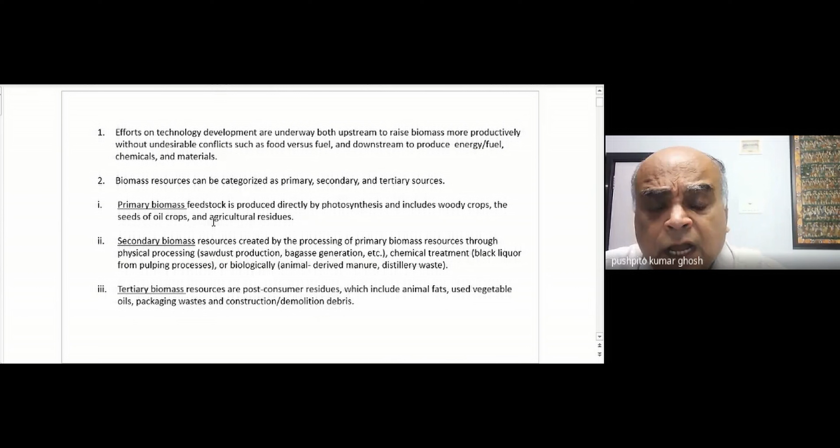Or let's say I have got paper packaging. Now you see a lot of it with all this Amazon delivery, so much packaging, cardboard boxes. Once it has done its job of delivering whatever good you had ordered, after that the packaging is a waste, so you have to do something with it. Or let's say you're demolishing a house and there was a lot of wood used in that house, so all that debris will now become tertiary biomass.

So I hope the definitions are clear of primary, secondary, and tertiary biomass. Is everybody clear about the definitions?

Yes, sir. Yes, sir. Okay.

Now, let's look at the interface. On the left, you have got biomass, okay? And on the right, you have got bioproducts. And of course, our focus will be really on energy, because this is on renewable energy sources, and so we'll be mostly focused on biofuel and power.

Energy means power, and not so much on the pharmaceuticals or value added chemicals and things like that. But those are also bioproducts. Okay. But our focus will be mostly here. And what we really have to look at is how do I go from biomass to this part? And so you have different kinds of ways of really treating biomass.

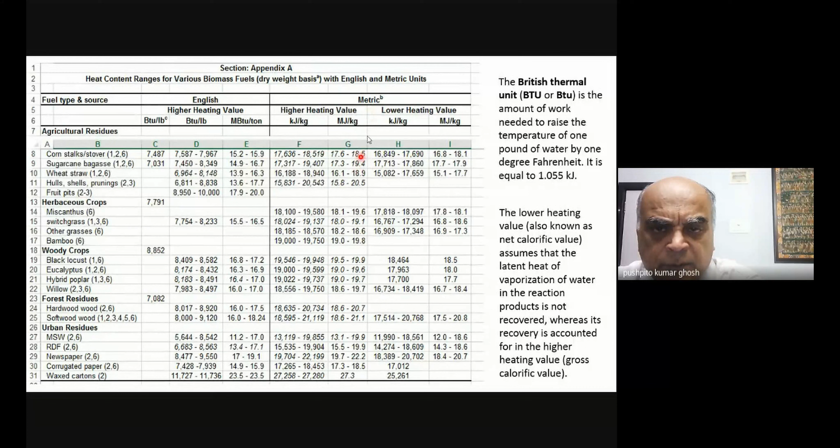So you can see how to express the two, in either BTU or in the metric system. Now the second thing is that you would see over here that they've got a higher heating value, especially in the metric system they've defined it, the higher heating value, and also the lower heating value. So, I think we discussed it briefly - can anyone try to recall what is higher heating value and what is lower heating value?

Water vapor is included in one. Very good, water vapor is included. Huh? What did you say? Yes, sir. And what does it do therefore? It takes into account the heat of vaporization. Excellent, excellent, okay.

Normally, let's say when we burn something, and we said that most fuels will have some hydrogen, except if you have got anthracite coal, which is like pure carbon, in which case it will only form CO2 when it burns. When it forms CO2, there's no issue - the higher heating value and lower heating value will be the same.

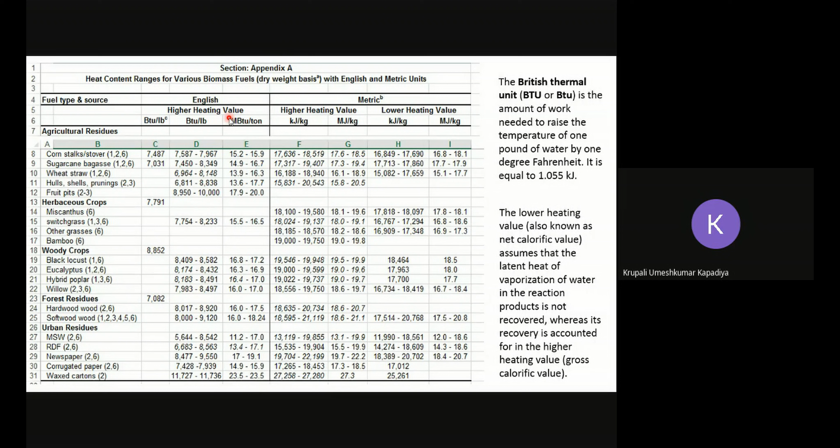But we know that water vapors can be condensed to form water. Now, if it condenses, what will happen? Once a vapor condenses, it liberates heat—very good—it liberates the latent heat.

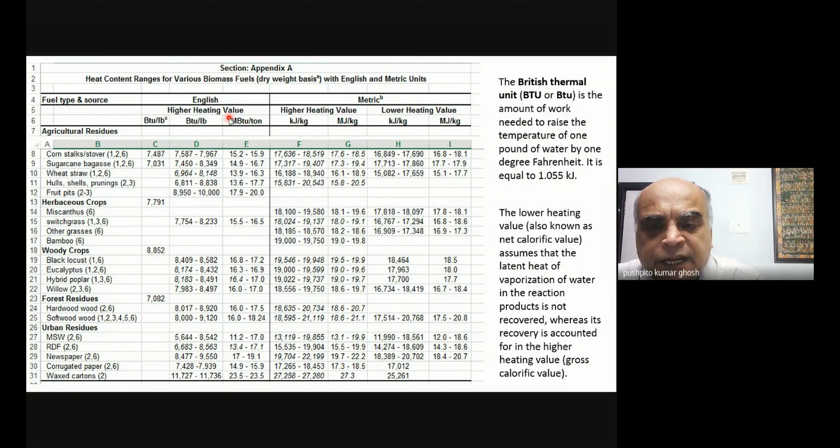So what happens is that if I do my operations in a way that I can recover the latent heat from the water, then it is called the higher heating value. That means I get the sum total, the lower heating value plus the heat that was evolved when vapors condensed into water.

Also, the higher heating value is many times called the gross calorific value, and the lower heating value is also known as the net calorific value. So just bear that in mind. For example, here you can see higher heating value 17.636 to 18.519, and this is 16.849 to 17.690. Obviously the lower heating value is lower because I did not recover the heat from the water that was formed, right?

Now, this thing tells you the calorific value of different types of agricultural residues. This is mostly focused on agricultural residues. So in most cases, you'll find that these values are not very different.

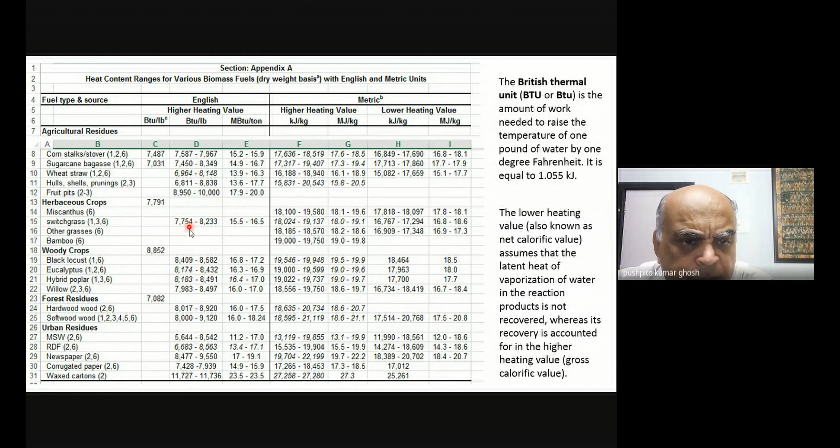Now, if for example I have things like municipal solid waste, where you could have a much higher moisture content, or refuse derived fuel, these things will tend to be lower. Whereas newspaper—after all, newspaper is basically cellulosic material, made from cellulose—so they will again be similar to these, not very different in terms of value.

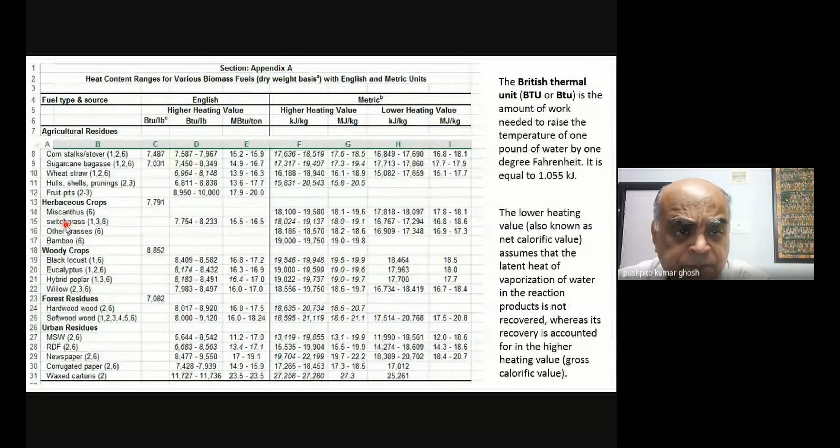Now it's very important for you to know that many people are trying to grow grass as a fuel. There are certain grasses which grow very fast—one of those we'll discuss is switchgrass. A lot of work is going on in the United States. This switchgrass grows very, very fast.

And because it is like cellulose, there's no difference between sugarcane bagasse and switchgrass—they're more or less similar. So I will expect to get similar kind of energy from grass as I will get from bagasse. There's not much of a difference.

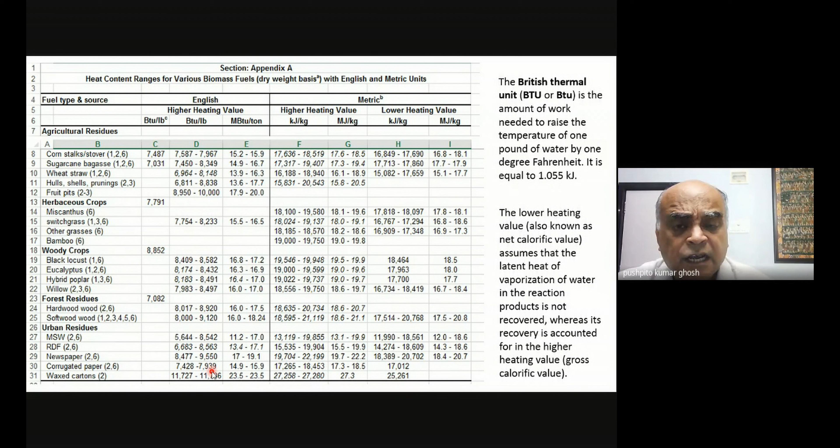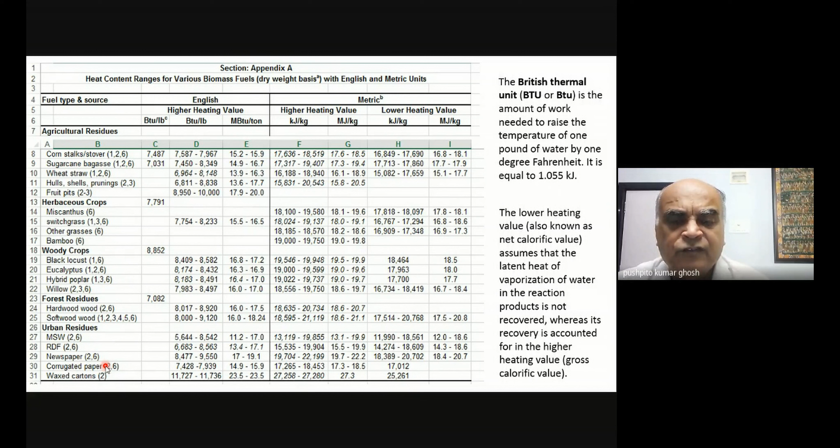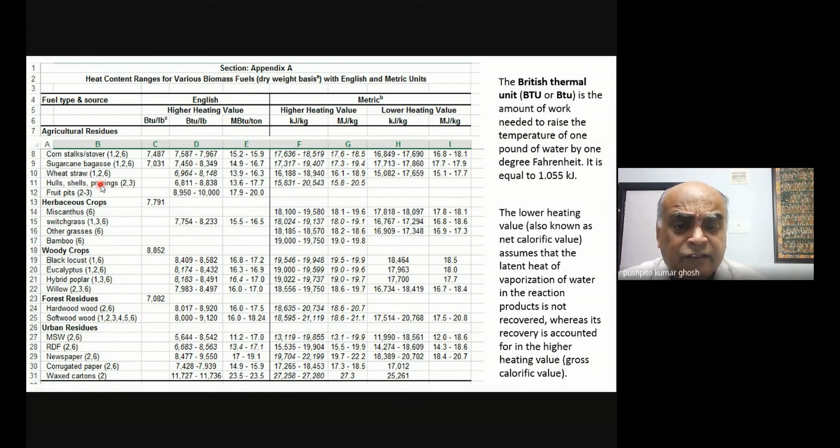Just keep this in mind, and at the end of it, which of these you will process really depends on what is available with you. Obviously, I'm not going to import things from far to process it—these must be readily available somewhere in the vicinity, and then I'm trying to derive fuel out of it. So that's really what this is. But it's very good that you can, at a glance, see the kind of calorific value different things have.

Now let me show you an example of a very smart application of the lower and higher heating value. Although this was not done with a biomass derived fuel, this work was done with methane, natural gas. But don't forget, I can also make natural gas from biosystems like biogas—that's also methane. It doesn't matter whether it came from biological sources or from petrochemical sources; methane is methane. Now what did these people do?

Now what they did was, earlier people were using coal and wood, burning it and generating energy. They needed to run their boiler, so they needed a source of fuel. Things like coal were being used.

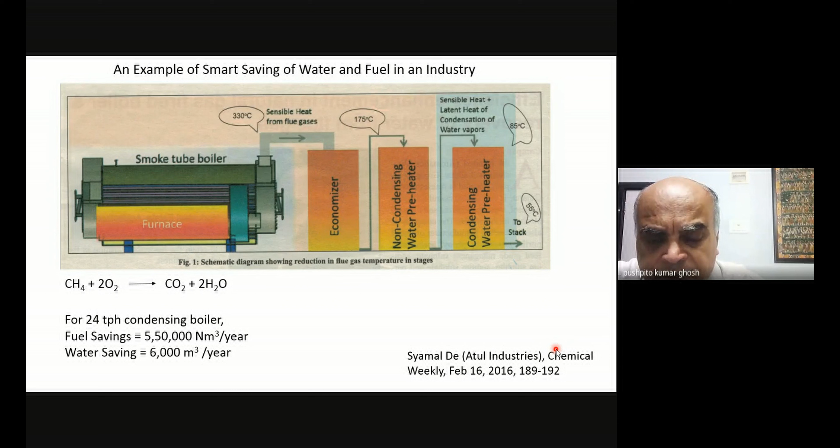So that's the advantage. Did everybody understand this? All clear? Yes sir, okay.

Now let us go a little further, and I will repeat these over and over again just so that it becomes a part of you. We talked about this briefly, but if I've got a biomass feedstock, I can do 4 different things with that biomass.

Well, actually there's a 5th thing that I can do, but this is mostly about thermochemical conversion. I could also do a chemical conversion or I can do a biological conversion. We're not talking about that here. We are really talking about thermochemical conversion, mostly where I have to heat it up to a high temperature, and some amount of chemical processing could also be involved in the process.

Now the most basic thing, of course, is combustion. Combustion means that I am supplying adequate amount of air and oxygen in it, so that all of my biomass can burn and burn completely to form carbon dioxide. That's what combustion is.

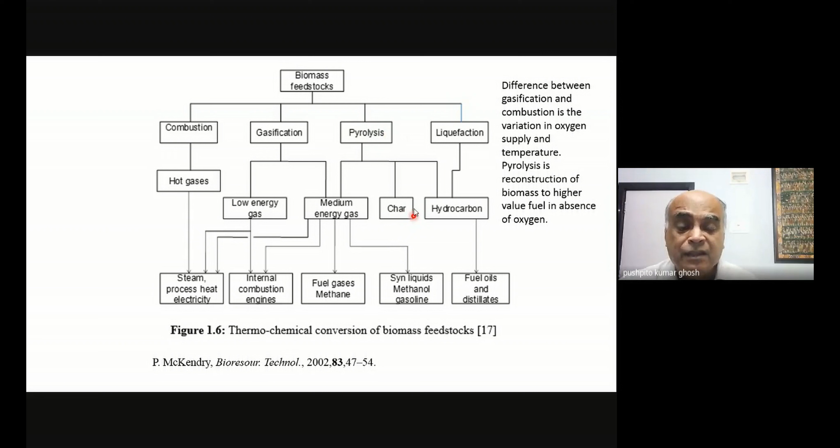Even from pyrolysis, I can end up, for example, in some cases forming methane, or I can end up forming char, like charcoal, like pure carbon. That's what I can do with pyrolysis. And if I've got pure carbon and also if I've got carbon dioxide, I can do very interesting combinations of the two and end up with synthetic fuels. We will again discuss that.

Liquefaction is a kind of hydrothermal processing where you have to use hydrogen as a second component. So I have my biomass and I also put in hydrogen, and in the process I can generate hydrocarbon type fuels, like fuel oils. So these are the various types of products which I can get from thermochemical processes.

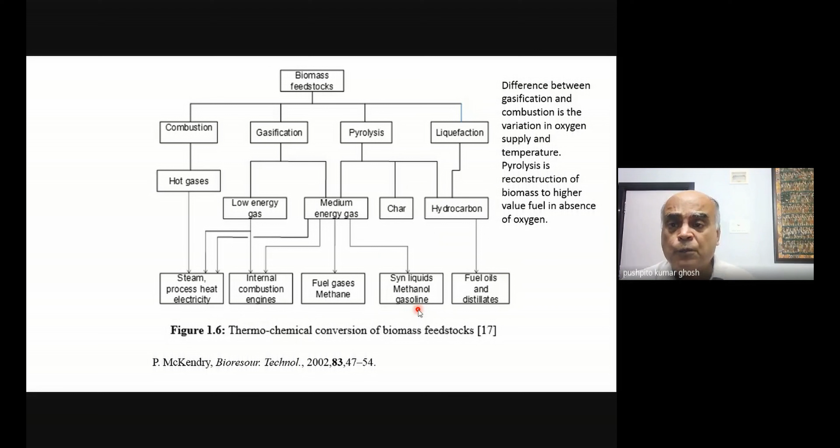Now let us also look at some practical things, very practical. And many times what you'll find is that our intention is good, we want to do things, but we don't facilitate what will actually make it happen.

For example, suppose I've got an agricultural field and I've harvested my crop. All that residue just lies in the field. What do people do sometimes? They'll come at night and light a match, and you'll find the whole field is burning. Why? Because they have to clear the field for the next round of planting crops, and they can't plant with all of this around. So they just burn it, and the ash is useful in the field, so they use that. But they're not making any use of the calorific value of this stuff.

But look at this, it's a simple machine, a baling machine. Look how beautifully they compact this stuff. I used to see a lot of it in England, every field you'd see this beautiful cylinder type of biomass. It goes into a baling machine and gets compacted. It need not only be cylindrical, for example you can see nice rectangular shaped biomass with very high density. This is not low density, it's extremely heavy. They compact it, and you can see how it gets compacted here.

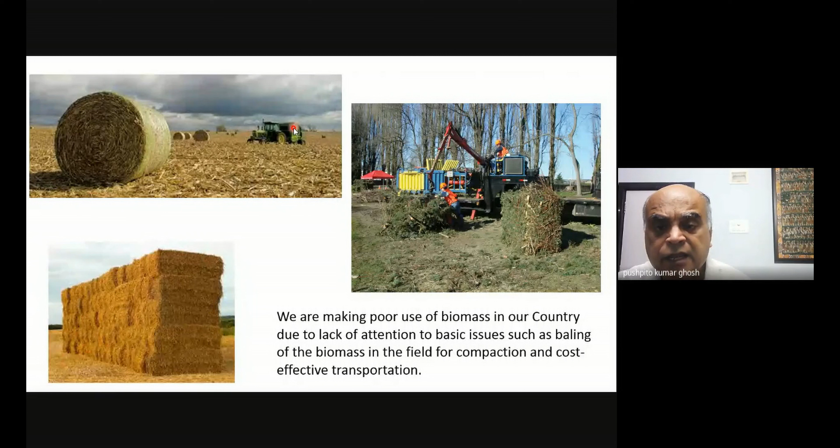So what I would say is that all of you go looking around, because many of you probably come from areas with a lot of agriculture. Notice, observe what they are doing. Can you suggest them something better to do? And exactly the same thing is true about municipal solid waste. If you can make it in a very compact form, a lot of people will take it and derive energy from it. So this is baling.

Now let me tell you about a couple of issues in more detail. When we say biomass, it's not just about carbon, hydrogen, and oxygen, or about proteins. All biomass tends to accumulate some inorganics, and when you burn it, what am I left with? I'm left with ash. Burn wood, you'll find there will be some ash.

Now this ash is good in a way because I get back the ash, and the ash could have very nice nutrients, because after all what is biomass? It is everything that the plant picked up from the field, and the minerals in the ash could be some of the fertilizer. For example, there could be potassium residues, or it could be silica from the clay etc. which has got absorbed, since a lot of plants have high silica content.

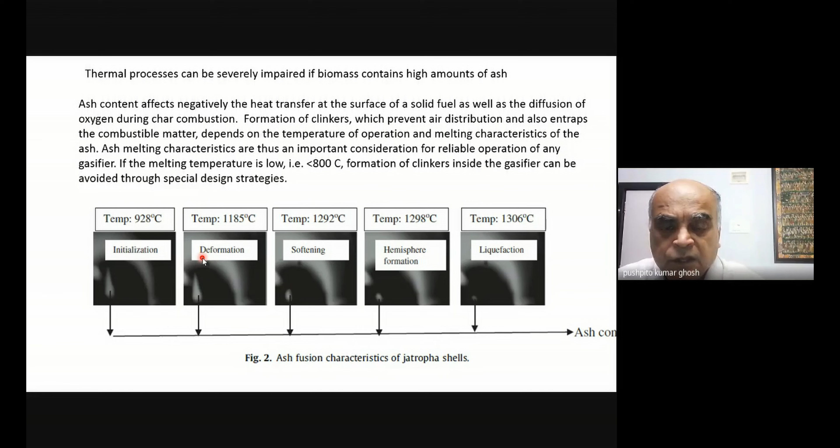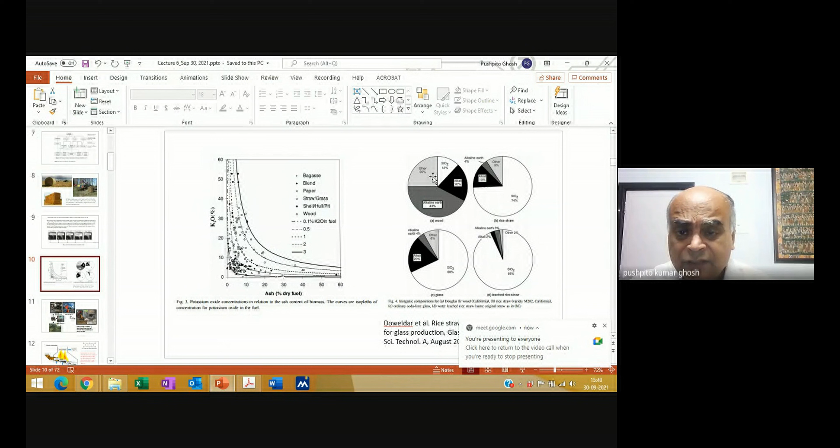This property of ash can be very detrimental to the thermal process of your gasification, combustion, everything, because this ash can have tremendous nuisance value. Just bear that in mind. If you look at ash, predominantly it is alkali and alkaline earth metal constituents. Alkali will be things like sodium, potassium. Alkaline earth will be magnesium, calcium, strontium, those kinds of things.

Most ash also contains a fair amount of silica. Your plant actually picks up a fair amount of silica from the soil, and then there would be other constituents. Broadly, this is the composition of typical wood. Now, the ash is not the same. For example, rice straw: given the amount of rice cultivated in India, rice straw becomes a very major biomass. But rice straw has a large amount of silica, and the alkali and alkaline earth are there in relatively smaller amounts, much smaller than in wood.

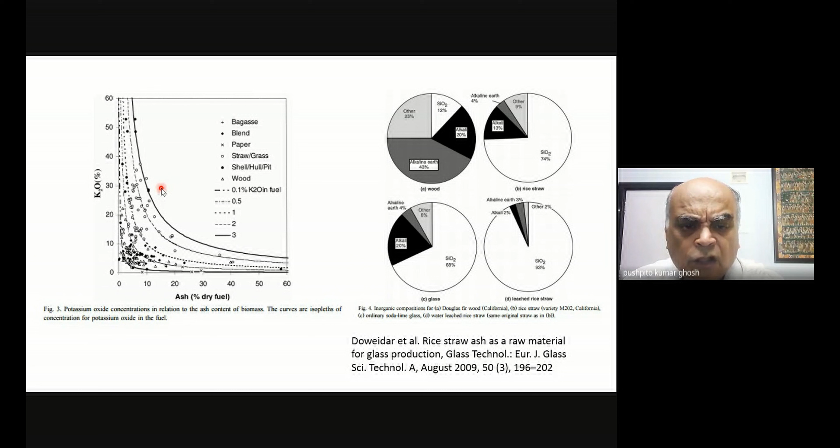Okay. Now, another term which you should know is what is known as the isopleth. For example, let's say I'm interested in a particular constituent, the potassium oxide, K2O, content of my ash. Now obviously if I take a biomass which has got high ash content, and also if that ash has got a high K2O content, then my overall amount of K2O will be high, because it's got a high ash content and the ash has got more K2O in it.

Okay, and what I'll get is the outermost curve, this curve, which basically indicates something which has got both high K2O and high ash content. Now when I go along this curve, what am I doing? Suppose I'm coming to a point where I've got a K2O content of 30%, but I've got only 10% ash. On the other hand, I could go to another point where I've got, say, 50% K2O, but now my ash content is only about 5%. So both cases will give me the same absolute amount of K2O from the biomass.

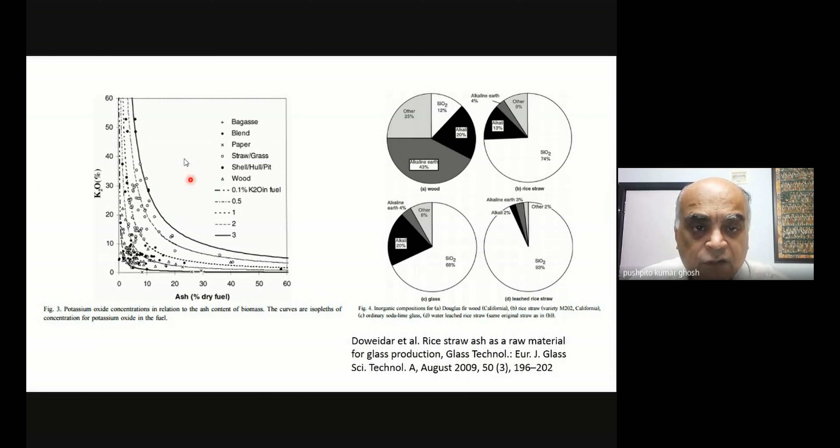All right, so these kinds of curves signify a curve where the constituent composition and amount is remaining constant all along this plot. And similarly, I can do this for different kinds of biomass, and I can generate what are known as isopleths, so this is one isopleth, this is another, and effectively it gives me some idea. If somebody is interested in a particular component, they can look at the isopleth and immediately come to a conclusion as to which way they would like to utilize the biomass. Okay, so just keep this in mind.

Okay, now when we do a normal combustion with a low tech, normally you don't reach those kinds of high temperatures at which the ash melts. For example, in a chula you'll typically find that at the bottom you'll get ash, but I've never seen liquid ash, because the temperature is not so high. You're operating at a fairly low temperature, maybe around 450 to 600 degrees at most.

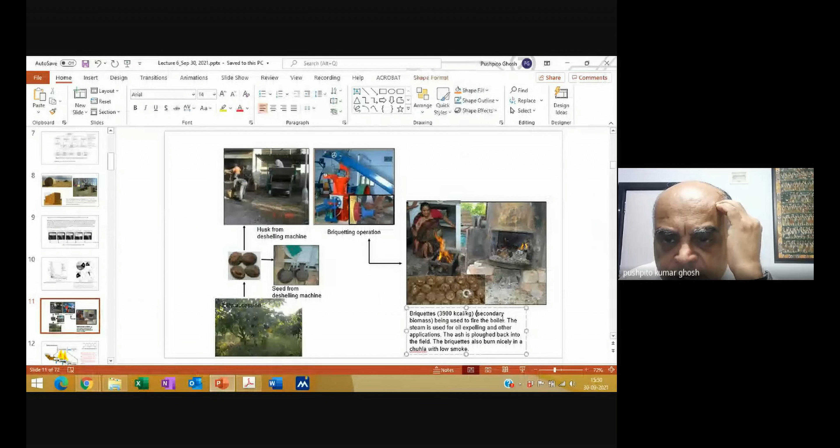Okay, so let's look at, for example, this now. So this is a plant, and these are the fruits. Inside these fruits you have got seeds, oil seeds. And I can have a deshelling machine which removes this husk, the outer stuff, and it gives you the seed. From the seed I can get oil. Now over here I didn't really do a processing of this stuff. I just basically deshelled it. So in a way, actually, I would treat it as primary biomass, not secondary.

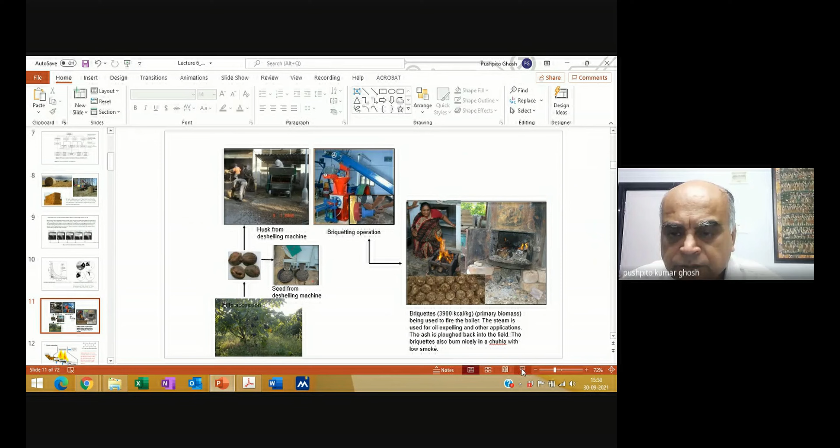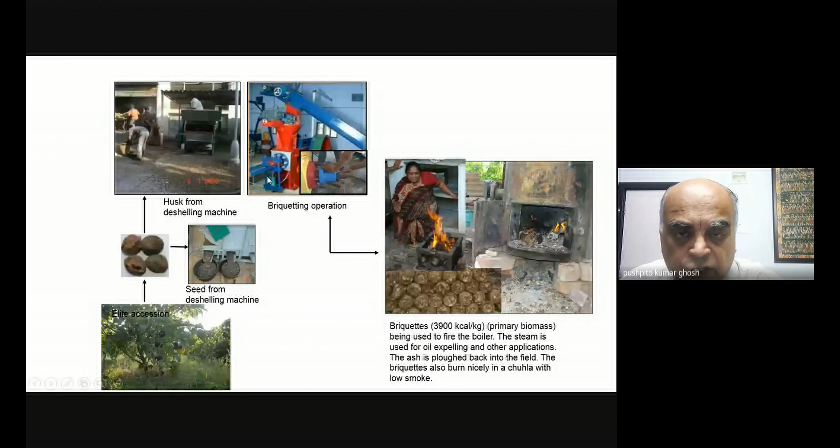And then you'll get this husk. This stuff is coming out, and then what you can do is pass it through a machine. This is called a briquetting machine, and it makes it compact, just like we saw the baling machine, except here you require to apply very high pressures. And you require some kind of a binder to bind it, and then you might end up with briquettes like this. So you can see this lady using these briquettes and lighting a stove. And it works very well.

All right. So this could be a kind of fuel that you use, and then the ash that you get, you can maybe put it back into the field. If you're close to a farm, then that would be the best way of overall utilizing the biomass through a thermal combustion process. Now, you could, of course, do things in a more sophisticated manner.

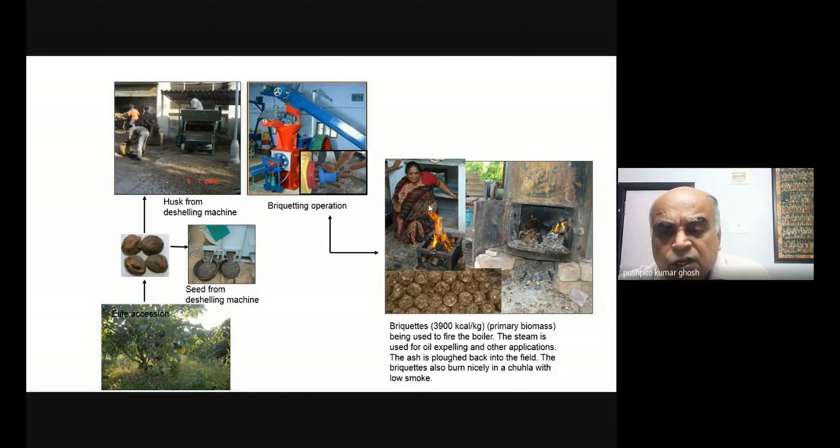Now, one of the things that you have to remember is that it looks very benign. This also looks so cute, everything is fine. But sometimes we don't realize that you could be actually generating very toxic substances, okay, in the gaseous stream, coming out along with your carbon dioxide and water and everything, and one of those is dioxin. It's one of the most carcinogenic substances. Okay, and although it is basically tetrachlorodibenzodioxin, this is typically known as dioxin. That's the very common term that is used for this.

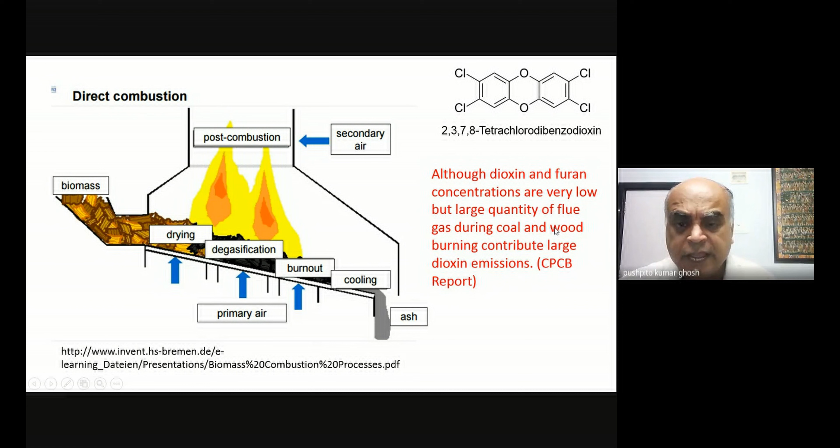Okay, and now dioxin formation is critically dependent on the temperature at which this whole thing is running. Okay, if the temperature is too low, then you might actually end up with high dioxin formation. So you may not realize that you're doing any harm, but it could be that there's a fair amount of dioxin that is coming out. Okay, and so people will obviously start looking at the kind of temperatures which are optimum for combustion, and make sure that the dioxin formation is minimum. Okay, that's vitally important.

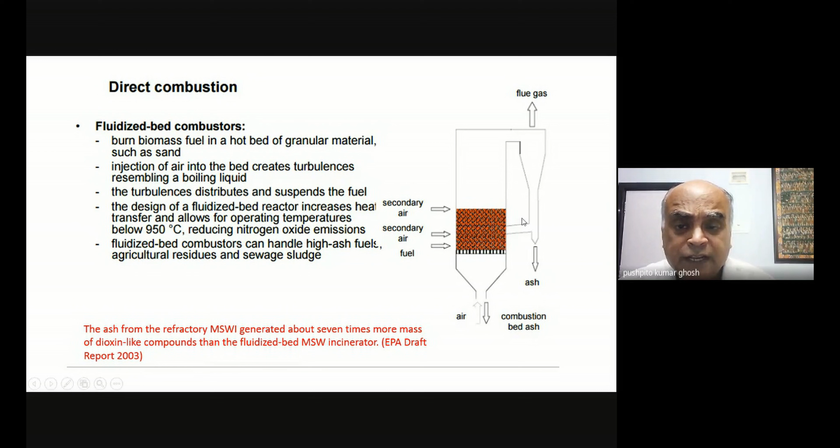But then these things generally will probably be more expensive, so your capital cost etc. will go up. So you'll pay a price somewhere. And secondly, your biomass - you'll have to grind it to a fine powder, and that again requires a lot of energy, to grind up things like sawdust, so one needs to be very careful. But say if I'm getting sawdust, obviously I'll try to use a kind of fluidized bed incinerator, because my sawdust is already in a dust form - it will be easy to fluidize it. But if I take otherwise things like wood, it will be very, very costly to try and grind it up to a powder. So there are pros and cons which you need to understand.

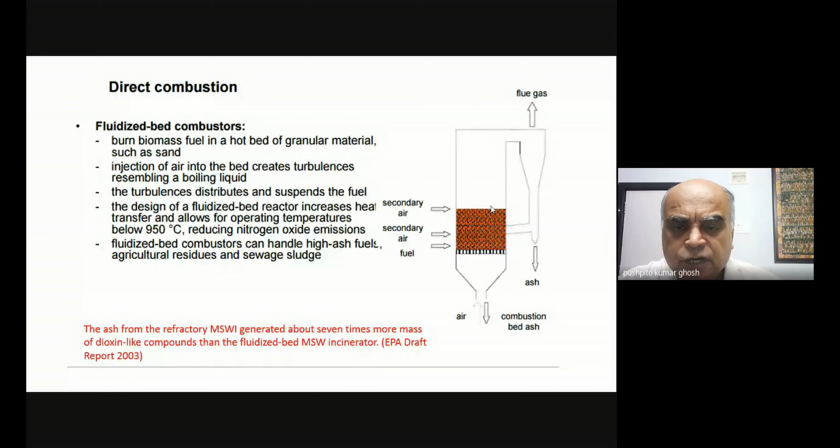Now let us look at going from combustion. Let us go to gasification. As I said, in combustion you end up with only carbon dioxide and water - it's completely gone to the +4 oxidation state of carbon, and all the hydrogen has come out as water. Now in a gasifier you do something different. So let us try and understand what is done in a gasifier. It's not miles away from a combustor, but very, very interestingly arranged.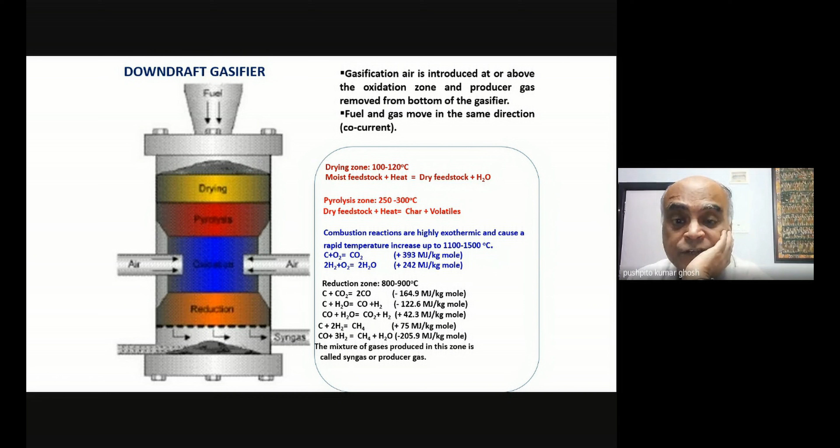These reactions - some of them are endothermic and some of them are exothermic. I think the way these people have written is by plus, they mean that heat is released, because they're talking about it as exothermic, and by minus, they mean that heat is consumed. So they have probably altered the signs from the conventional signs as we know it, because we know that hydrogen and oxygen will burn to form water in a spontaneous reaction. So what they mean is that it liberates heat - by the plus here, they're talking about liberating heat.

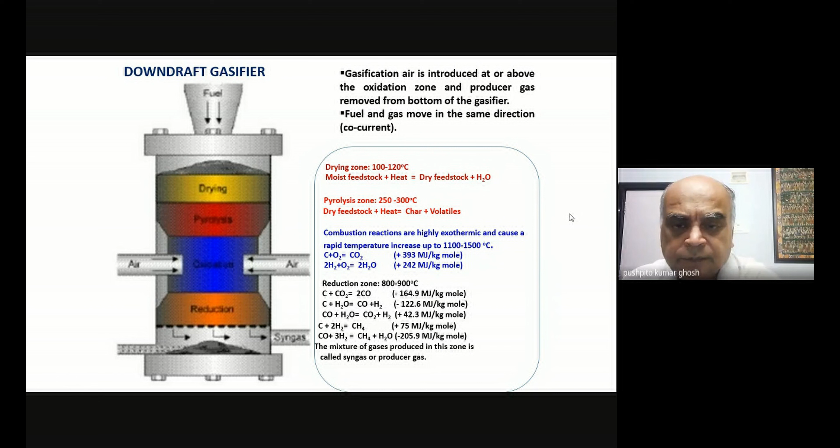Now, in this gasifier, you have two types of gasifier, actually three types. The one that I first described to you is known as a downdraft gasifier, where the fuel and your product are both flowing in the same direction. Everything flows in the same direction, and you can see the ash coming out from here, and your gas coming out from here.

This is one, and then you have what is known as an updraft gasifier. In the updraft gasifier, my oxidation zone, where my combustion takes place, is right at the bottom. So this is my hottest zone - here my hottest zone is here.

What has been found is that in this particular case, you can actually take biomass which has got more amount of water - it can tolerate up to 40% of moisture, it can tolerate more ash. In the other case, it tolerates less amount of moisture, something like 10 to 25%.

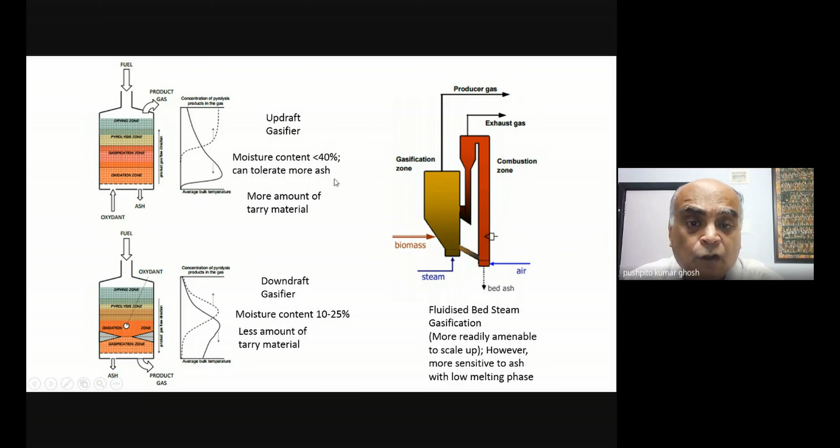So this is the updraft gasifier, and this is the downdraft gasifier. You can see the maximum temperature is basically around the combustion zone, this is my combustion zone, oxidation. So naturally the temperature is highest here. Over here, the temperature is highest here.

And this is the concentration profile of pyrolysis products in the gas. Over here, it increases and then goes down, because as I told you, some of these pyrolysis products will tend to get cracked in the oxidation chamber, whereas here it just keeps building up. And that's the reason why more tar gets carried along with your producer gas.

Now, exactly in the same manner as we saw the fluidized bed combustor, incinerator, you can also have a fluidized bed gasifier. I'm not going to go into the details of it, but there's a very interesting setup here where the combustion gases, CO2 etc., a lot of the exhaust gases tend to be taken out from a separate outlet. In this particular case, they have designed it very cleverly, whereas the gasification which takes place is mainly the producer gas which travels in a separate outlet. And because of that, you tend to have a much richer producer gas, free of carbon dioxide for the most part. Whereas here, there would be a lot of carbon dioxide, which may also be present in case some of the CO2 did not get converted into CO, if the gasification did not take place.

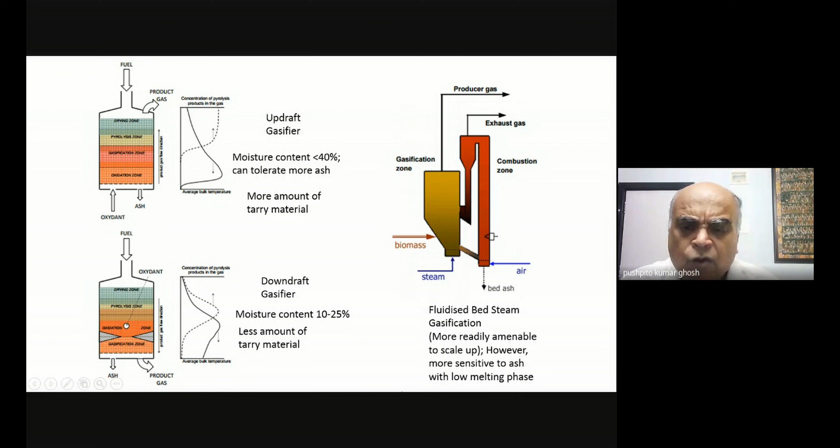So you can generate electricity or you can generate heat, whatever you want, and the gas as it's coming out from here, it's a very drawn out process. You need to, as I said, eliminate tarry matter, because otherwise you will completely choke up everything. You need to separate out particulate matter. There are unburned things which will come out, so you need to take those out. And also, there will always be some amount of water production, as we saw, so you need to dry the gas. So these are the operations that you will do after you have done your gasification.

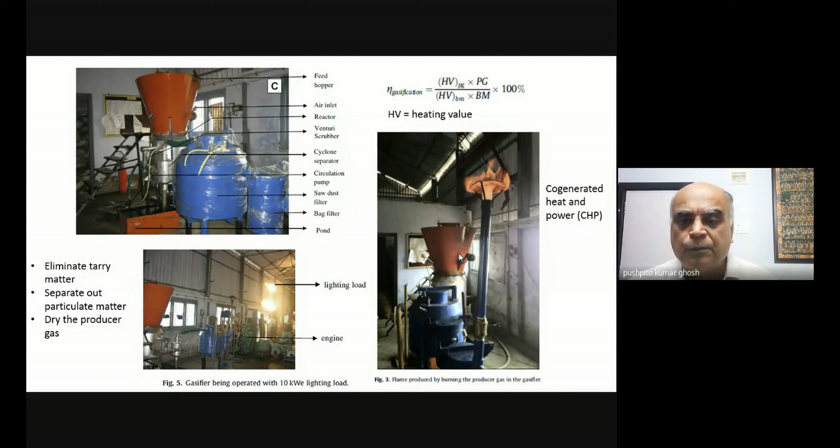Is it clear to everyone? Yes, sir. Okay, yes, sir.

And you of course, when you go deep into the subject, naturally there is a lot of design. We are not going into those aspects in this course, but for that you need to understand each and every reaction in great depth. You need to understand the thermodynamics of the reaction, the kinetics of the process, and what constituents are being formed. What do I have to do in terms of post purification? All of that stuff will need to be worked out.

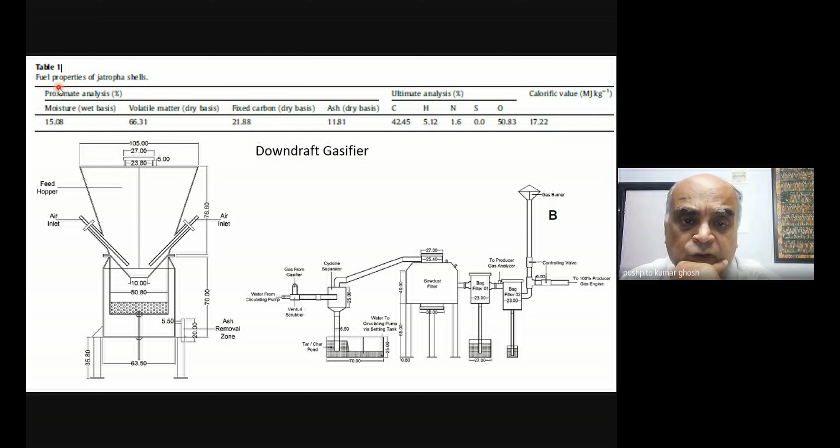I need to know the calorific value of my fuel, so that I can design accordingly, because there should not be an explosion, right? You have to be very, very careful while developing this, that it can withstand the pressures that will be generated, and that in turn will depend on the calorific value of the fuel. So this is how you design.

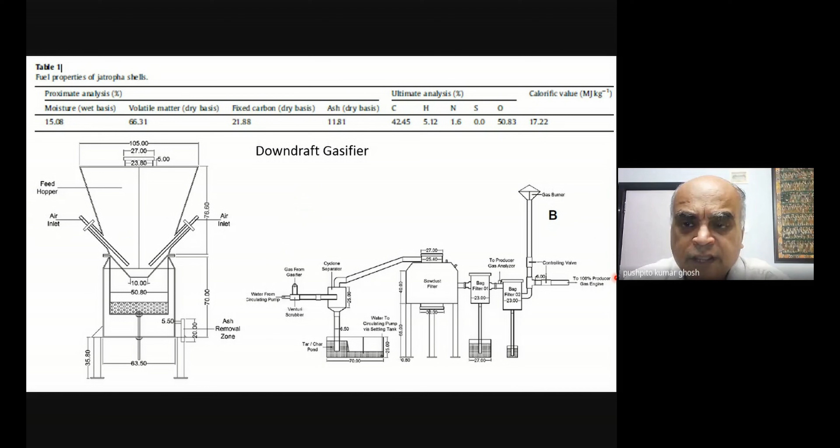You can ignore the drawings; no questions will be asked on that. Now this, for example, is an actual data. Maybe I'll pass on this paper so that you can study it. So what did we say is formed? Once I've dried the producer gas, the water is gone.

Assuming that all my carbon dioxide was completely utilized in the reaction with carbon, then all my CO2 will get converted into CO. So I will effectively have CO, CH4, and H2, and I should not have anything else. This is what I'm then feeding into, let's say, an internal combustion engine.

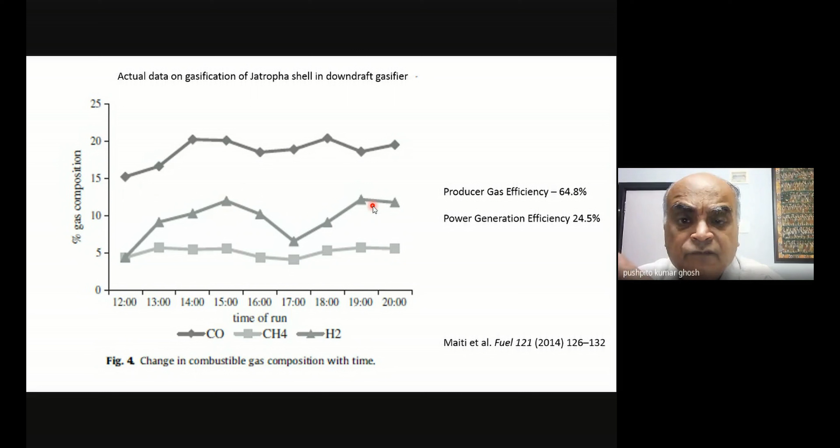What you have to do is you can do gas chromatography and monitor how these individual constituents are changing over time. I've fed my biomass, and from the way these things are changing, you can figure out the kind of reaction, the relative kinetics, etc., taking place in the different zones. Also, I will come to know whether I am getting a steady output, or is it fluctuating. Maybe if it's fluctuating, there is some problem somewhere which I'll have to look at. So you monitor the gas composition as a function of time, and just see what is the level of steady behavior that you're getting.

This is methane, this is hydrogen, and this is carbon monoxide. Now, by integrating this, that's how you will find out, because I know what is the calorific value of these things. From the percentage, I know exactly what is the sum total of their calorific value, and that's how you calculate the efficiency, the heating value. So I get the heating value of the individual constituents, and from that I can calculate further.

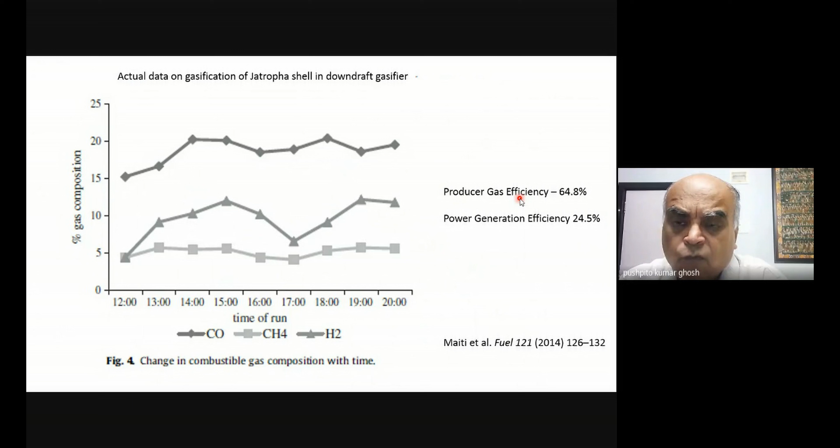So you can see the producer gas efficiency in terms of the total amount of calories which were there in my biomass, to what was the percentage of conversion, how much of that calorie ended up in my producer gas, is pretty good. In this particular case, it's about 64.8%. Not bad. And you can see, when I am generating power, the efficiency of power generation will be something like 35% from the producer gas. In other words, I've got my power generation efficiency as 24.5%. So you'll find that generating power from producer gas, roughly about 35 to 40% is the efficiency of the conversion.

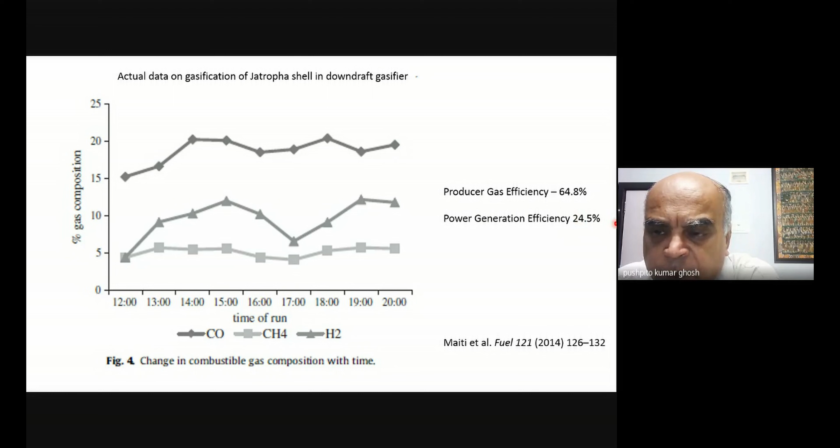Now let me also tell you some remarkable things which people are doing with biomass. Up till now, we have talked about generating heat, from a combustor, or generating heat from producer gas, or generating electricity from the producer gas.

Because we saw that the producer gas is primarily syngas, you can actually carry out reactions. So I took some cellulosic material and generated syngas through gasification. In case I've got too much water and CO, I can also carry out the water gas shift reaction and generate more hydrogen and CO2, and I can even scrub out the CO2. I can do a correction as is required.

Now there is a well-known reaction known as the Fischer-Tropsch synthesis. I'm not going to go into the details, but I expect that you will read it up, where I can convert syngas into hydrocarbons, just like diesel or petrol. I can make this stuff. So I can actually start with biomass and ultimately end up with standard fuels like diesel and petrol.

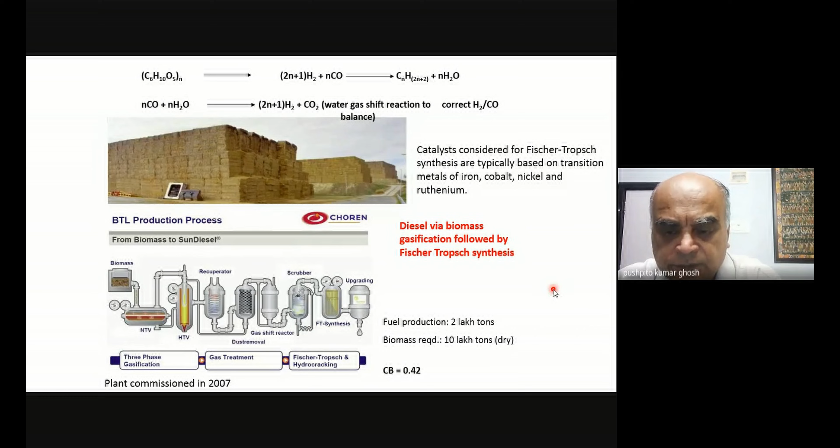Now let's come to pyrolysis. What did we say? Pyrolysis is really an anaerobic process, and you're doing it under a reducing environment. It generates, and in the process there is heat that is required. Most organic biomass will have certain volatile materials.

So in pyrolysis, two things happen. One is that all the volatile substances get removed, they're taken away. And the second thing is, as we said, that any of these cellulose or carbohydrate type materials, if you remove water, then you're just left with carbon. There's no change in oxidation state. It goes from carbon 0 to carbon 0.

C6H12O6 or its polymers are all carbon 0, because each oxygen is -2 by convention, -2 into 6 is -12. Each hydrogen by convention is +1, so +12 and -12 cancel out, and my carbon will have an oxidation state of 0. And in elemental carbon also it is 0, so there is no redox process that takes place during pyrolysis.

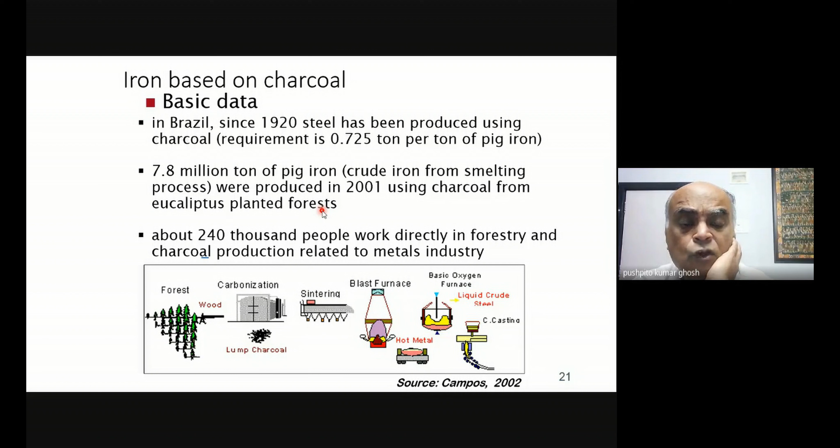So in Brazil, it's very interesting. I'll show you in one slide. They are continuously cutting down these trees and they're planting, and they have struck a balance between how much they should cut and how much it will grow, so that they have more or less reached a steady state in terms of not destroying their forest in making this.

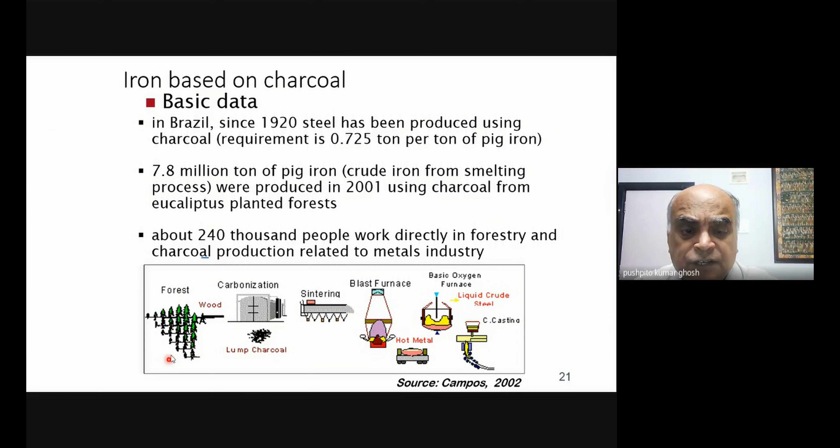And a large number of people, 240,000 people, were involved in this activity of basically making the charcoal, so people who grew plants, who cut plants, who converted it into charcoal. It's a massive operation. And their primary energy is coming from the forest.

So if you can cut and grow at the same rate, then it becomes a renewable resource. If you don't do that and you're just cutting and not growing at the same rate, it's a non-renewable resource. As simple as that. All right.

So you can see that of course it is possible because Brazil has got a huge land mass. Brazil is much bigger than India, and it has got about a fourth of our population. So they've got maybe 3-4 times the amount of land, and they've got 4 times less population, and it's very fertile land. And so obviously, they can do things there which we may not be able to do. So while it looks interesting, keep in mind that it may not be that simple to replicate this kind of thing in India.

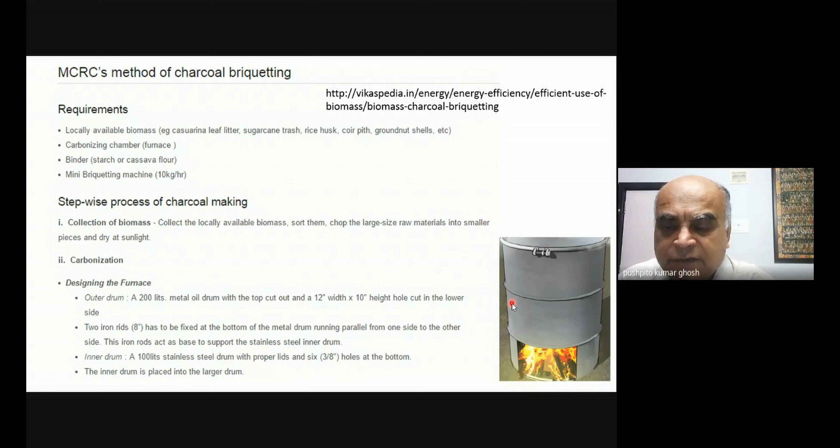Okay. That's what you have. All right. And because it is a closed drum, there is very little air entering this. So it provides the anaerobic condition that you require for char formation, that is, for pyrolysis. Okay, that's effectively what you have. So outside the drum, of course, air is coming and heating up, but the inside drum is protected from

air. Okay, so you can see the outer drum, a 200-liter metal oil drum with a top cutout and a 12-inch width hole cut in the lower side. This one. Okay, 2 iron rods are fixed at the bottom of the metal drum, running parallel from one side to the other, and that is to place the inner drum. So the iron rods act as a base. It supports the inner drum.

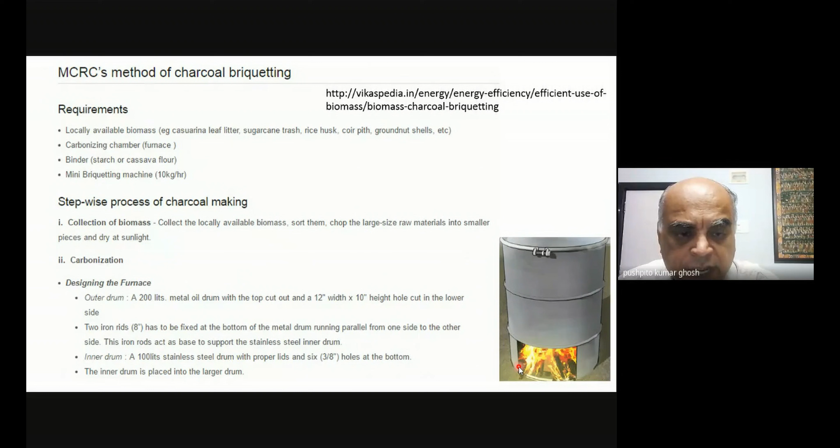Okay, and the inner drum is about 100 liters capacity. There are holes in the bottom, and those holes allow the volatiles to escape from the bottom. Okay, and you just place the inner drum inside the outer drum and carry out this process.

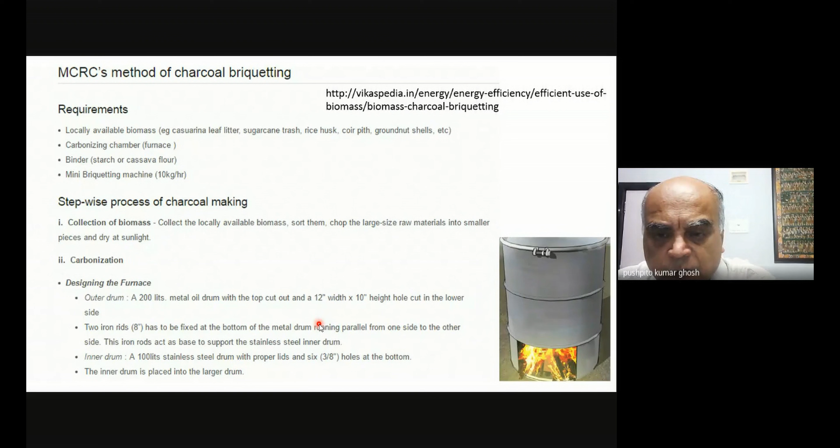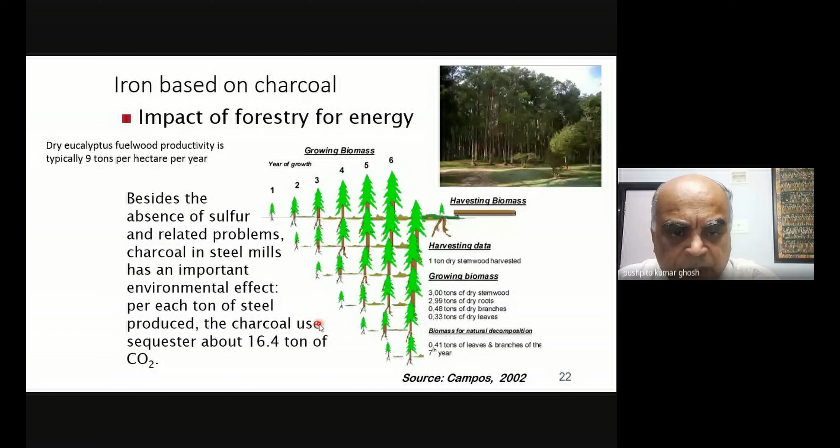Okay. Then you look at carbonizing the biomass. Biomass is tightly packed in the inner drum and fired for 45 minutes to 1 hour. After firing, the carbonized biomass in the inner drum has to be collected and weighed. In this method, 30% of carbonized char can be obtained. So from 100 kg, we are getting about 30 kg.

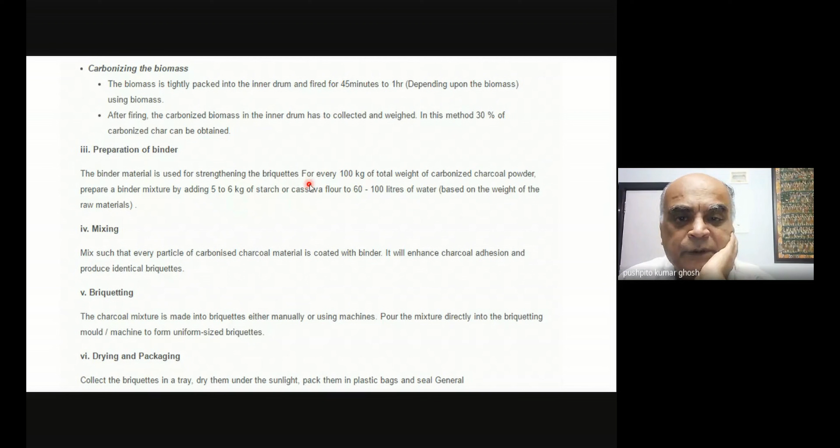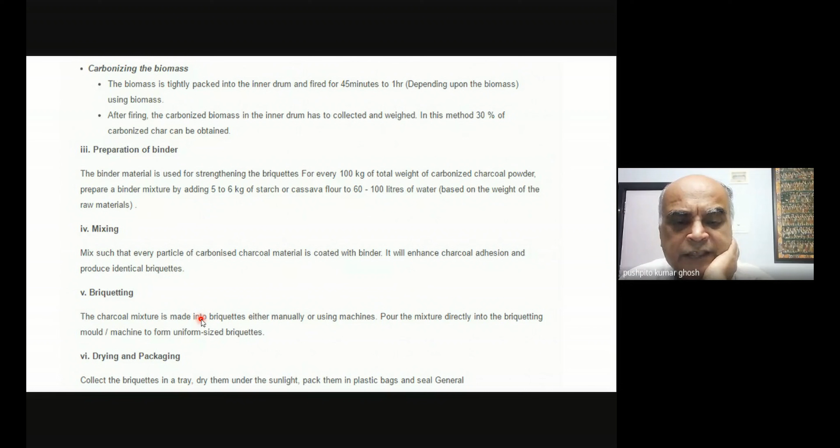Okay. The binder material is used for strengthening the briquettes. For every 100 kg of total weight of carbonized charcoal, they add about 5 to 6 kg of flour, and that is the binder. They mix it up, and then they briquette it. And I showed you a briquetting machine before. So you can just briquette it and make uniform size pellets. And then those are dried and packed, and those are your charcoal briquettes.

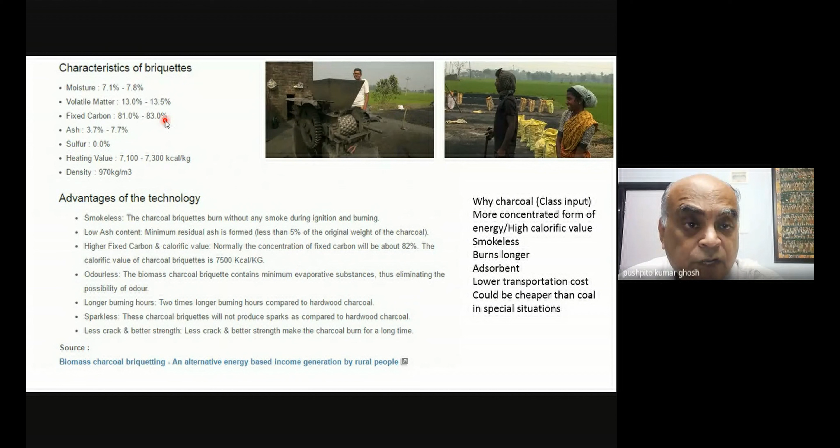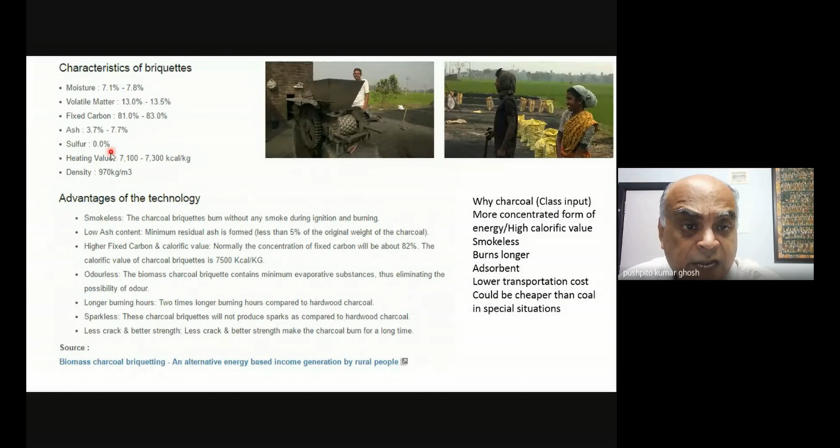Okay, now typically you can see the characteristics of the briquette. There's still some moisture, about 7%. There is some volatile matter, but the fixed carbon is close to about 83%. There's very low ash in this system, sulfur content tends to be low, and you get a very high heating value from this charcoal. Okay, keep that in mind.

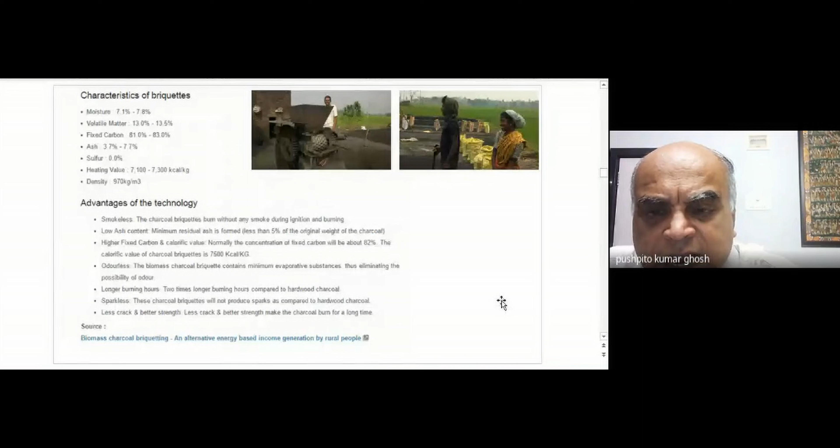Can someone tell me why you make charcoal? What is the advantage of charcoal over biomass? More carbon content. Yes, more carbon content, and it has a higher calorific value. So transportation becomes easy. But there are other reasons also: charcoal actually burns very cleanly. You get a very clean flame out of it. So from the pollution angle also, it is much better. Those would be some of the main reasons.

And also, let me tell you, some of the charcoal can also be converted into coke. You know that for making stainless steel, let's say, you need coke, right? Because stainless steel has carbon in it. So you can actually provide that carbon, the coke, by taking charcoal and then converting it into coke. So those are the importances of

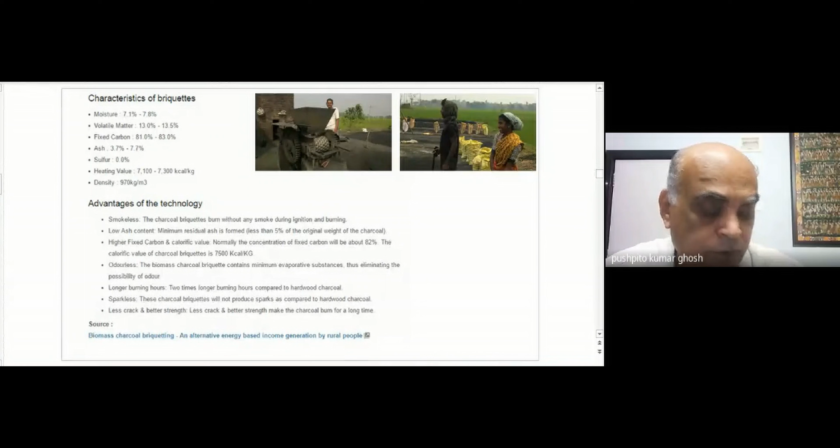having charcoal. Okay? And another is that transportation cost is much less, because I'm transporting something with a higher calorific value. So obviously that is preferable, because many times you have to transport these over long distances, so that becomes important. Okay? Now let us go to the last part, which is biomass to liquid.

I'm talking about thermochemical processes. Now this, as I told you, is of great importance. It's possible that in the long run it may not be so important, but as of now it certainly is, because India spends so much money on buying petrol and diesel, or all the crude oil. And so if you can get it from renewable sources like biomass, that would be nice.

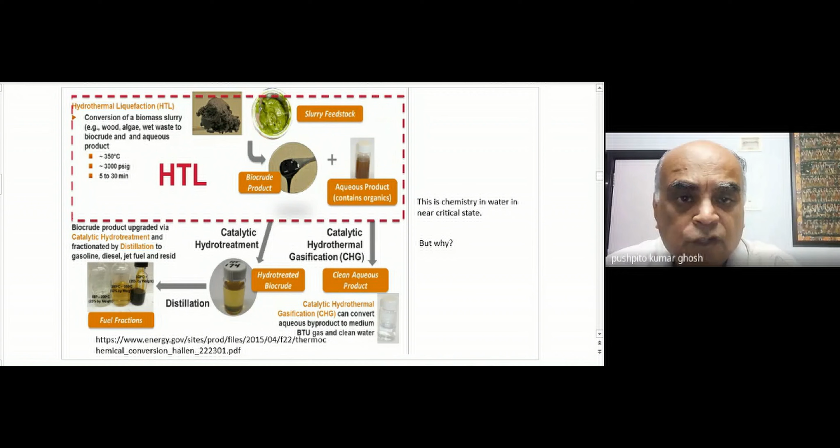Okay, so it's important that we try and understand the process of converting biomass by hydrothermal liquefaction. So that is what HTL stands for, hydrothermal liquefaction.

Okay, now, so what are we doing? As we said, hydrotreatment means that you also require hydrogen to carry out this process. Okay, so that's one drawback, because then you'll require hydrogen, and that hydrogen has to come from somewhere.

Okay, now the other problem with this is that you require very high pressures and temperature. Temperature not so much. I mean, combustion has higher temperature, 350 degrees centigrade, but look at the pressure that you require, 3,000 pounds per square inch. Okay, that's huge. We are talking about close to about 220 bar pressure, that kind of a pressure.

So what that means is that I need equipment which can withstand that kind of temperature and pressure. And when you're talking about biomass, you're talking about such large volumes that you can well imagine what might be the cost of making such a reactor.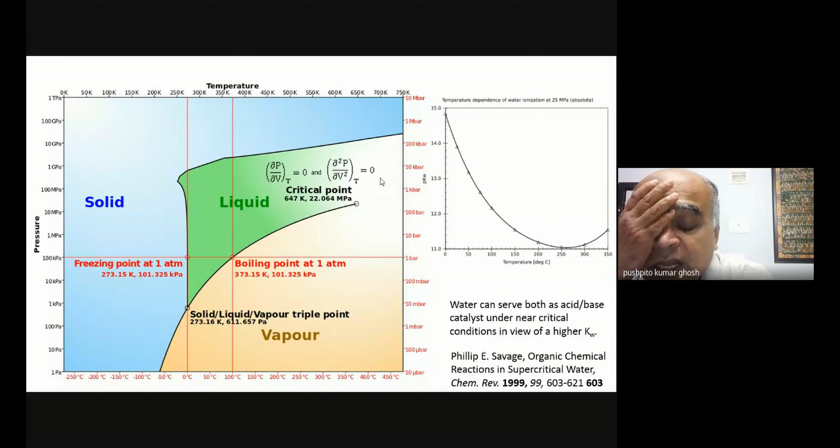That is the dissociation constant of water under normal conditions, like under ambient conditions, or even if you take boiling water or steam, it will not be very different. But what happens is that water, when you start heating it up and it comes to a temperature of around 300 or so, the dissociation constant value is increasing, and therefore my pK is coming down.

It's 12, meaning I've got now 10 to the power minus 6 into 10 to the power minus 6, or if I'm here, it will be about 10 to the power minus 5 into 10 to the power minus 5, which is 10 to the power minus 10. This is 11, or somewhere thereabouts, between 10 to the power minus 5 to minus 6 molar H plus, and 10 to the power minus 5 to minus 6 molar OH minus.

What it means is that under those conditions, water is more acidic than the normal water as we know it. Normal water is neutral. But the water under these critical, supercritical conditions has got more acidity as well as more alkalinity.

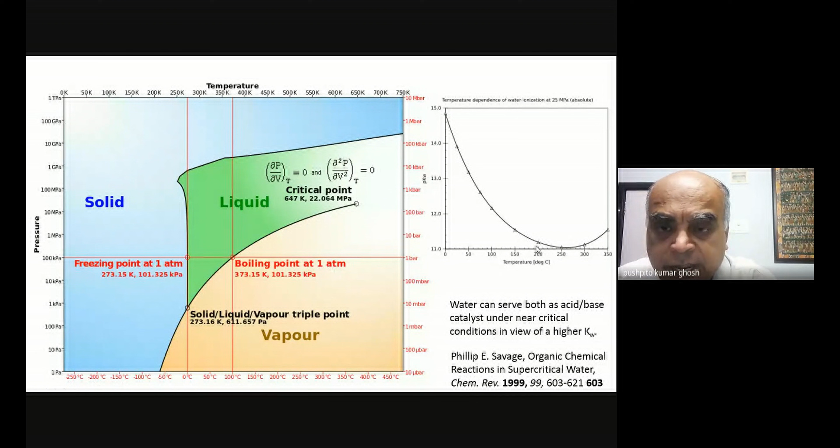And so it can induce acid and base catalyzed reactions of this biomass, like breaking it up, and you can do all kinds of things which you normally would not be able to do. That is one of the important reasons why I need this kind of operating temperature and pressure.

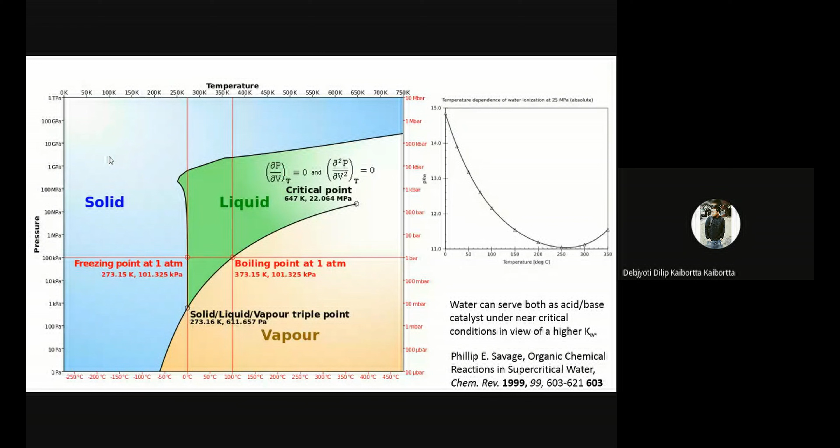This kind of process has been used, for example, in some of the work done in India on making jet fuel from biodiesel. In fact, India was the pioneer, but that biodiesel cannot be used in an aeroplane because it tends to solidify at around minus 5 degrees centigrade. If you add some additives, you might take it to about minus 10 degrees centigrade, but beyond that it will solidify. We'll discuss that conventional biodiesel.

Now, what has been done is, you can see this was a Boeing 747 that was run on biofuel made from the Jatropha plant. But this biofuel is different, obtained through this process. Effectively, you make a bio-crude and then do catalytic hydrotreatment, and convert it into fuels which are more like our kerosene, petrol, etc.

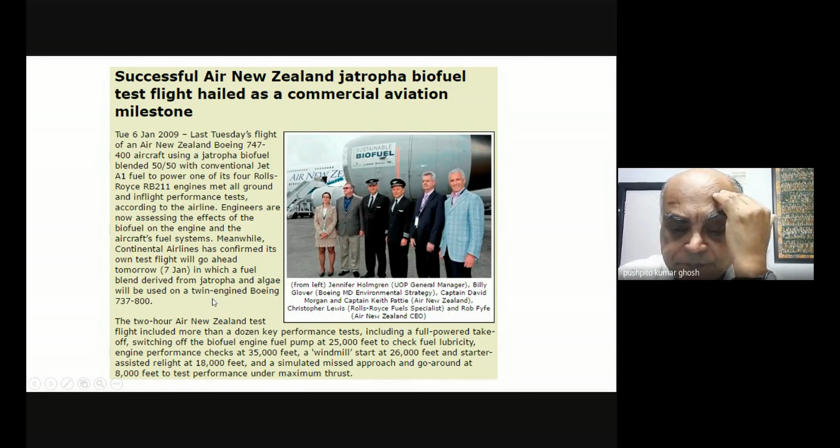Let me also tell you, I can actually take wet biomass, refuse, etc. But what happens is that if I take cellulosic biomass, my requirement of hydrogen becomes much higher. On the other hand, if I take an oil - peanut oil, groundnut oil, soya oil - because those are primarily CnH2n type molecules, only at the end is there a fatty acid, the requirement of hydrogen is very nominal.

In those kinds of cases, people prefer to do this kind of hydrothermal liquefaction with oils rather than with cellulosic biomass. But then I feel that it just defeats the purpose - the advantages of the process in terms of being able to treat wet biomass are gone. It's okay for special requirements, as I told you, when you need to operate in very low temperature, cold climates. But there are so many applications where we need diesel in regular road use applications, so I think we should first try to make those things before we start making all this aeroplane fuel, because there is so much energy expended in doing all this.

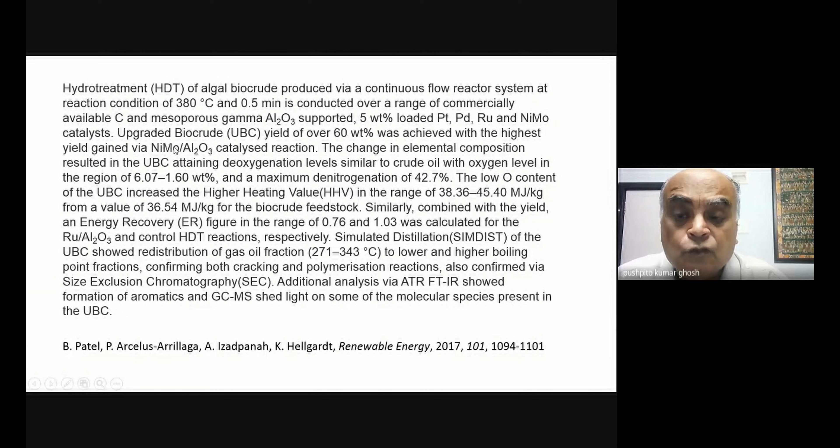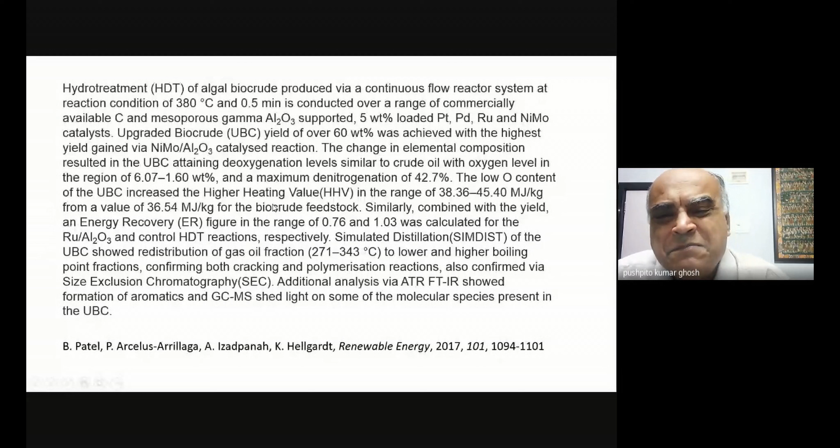So you have to do a balancing: how much energy did I spend, how much energy did I require for my process, and how much did I get out? If that is not very attractive, it doesn't matter how great all these products are - it may not really be such a wonderful thing at the end. So bear this in mind while taking a decision as to what you should do with the biomass.

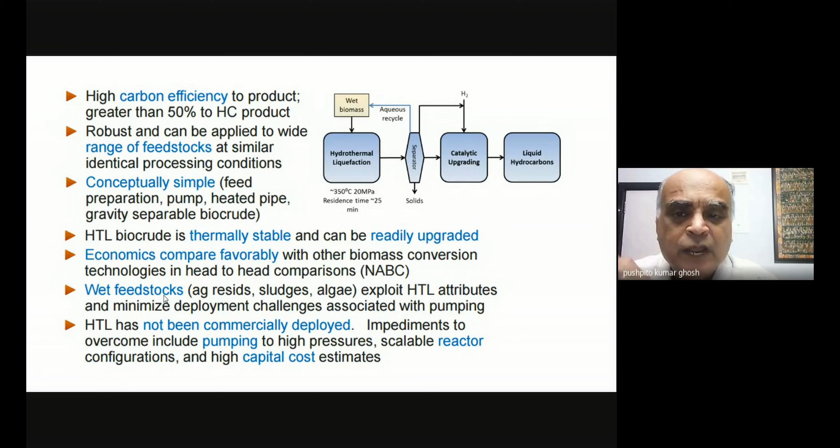One of the biggest advantages is wet feedstocks. I can take wet materials and process them. We will come across another case where you can do wet feeding, which to me is far more intelligent than this, but it's done by nature.

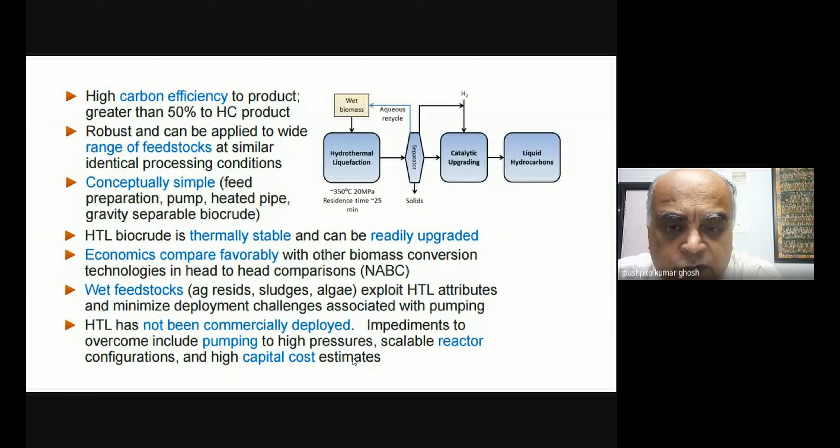Finally, the proof of the pudding is in the eating. What does it say? HTL has not been commercially deployed. Impediments to overcome include pumping to high pressures, scalable reactor configurations, and high capital cost estimates. So it's all great—you might make a pilot plant, you might even make a few thousand tons of fuel to run pilot experiments. But if I have to make millions of tons, then you have to ask yourself. But if there is some technical solution and someone comes up with something smart, then yes, it's possible that we might be able to do it in the future.

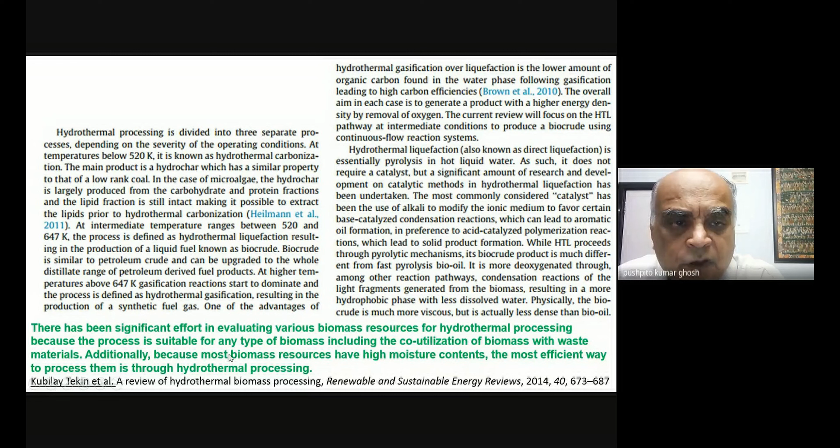I have more or less said the same thing here, but giving you a little more detail. I want you to read up the details—I'm not going to read it out. I have also given you the reference; you might want to look it up. This is the broad detail of the hydrothermal process, where you can see a little more of the actual experimental details.

Now let's come to the last part. What did we say is a great thing about hydrothermal liquefaction? One of the big nice things is that I can use wet mass. That's exactly what I can do when I ferment biomass to make biogas.

One of the things used especially in Maharashtra is important: after you distill ethanol, what you're left with is called spent wash, and it's got a fair amount of organic still in that liquid, so you don't want to get rid of it. In fact, disposing of that liquid is a big problem. So what people do—all the bio mills, all the biorefineries in India, and I'm sure all those in Maharashtra—is generate biogas out of it.

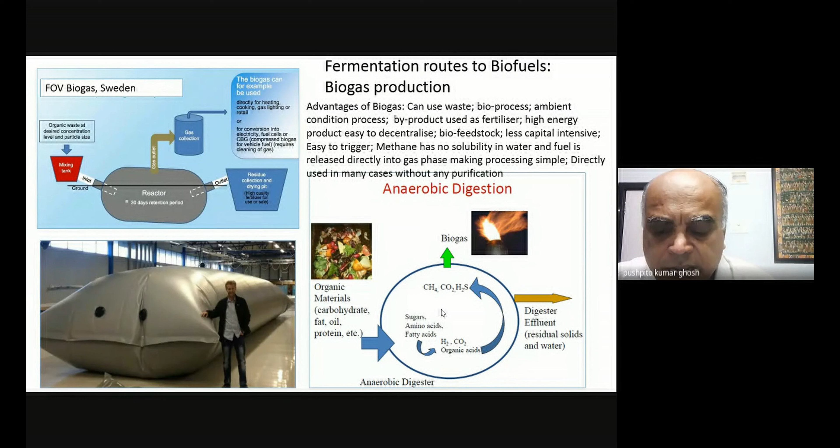Here I've put it in a closed environment, so I know my methane is contained. But what happens is that any of these cows or buffalo, the ruminants, release something like 70 to 120 kilograms of methane into the atmosphere each year. You can't put them inside a balloon like this - they're just letting off their methane into the atmosphere. And methane is 25 times as potent as CO2 as a greenhouse gas, so if you just let methane out into the atmosphere, you're causing havoc.

In fact, there's a huge amount of research going on in how to tailor the diet of these cattle so that they produce less methane. One such formulation had been developed based on seaweed technology. The conclusions are by the Indian Council of Agricultural Research - this is the Veterinary Research Institute in our country. What they've said is that supplementation of both of these additives reduces methane emission. So that's great.

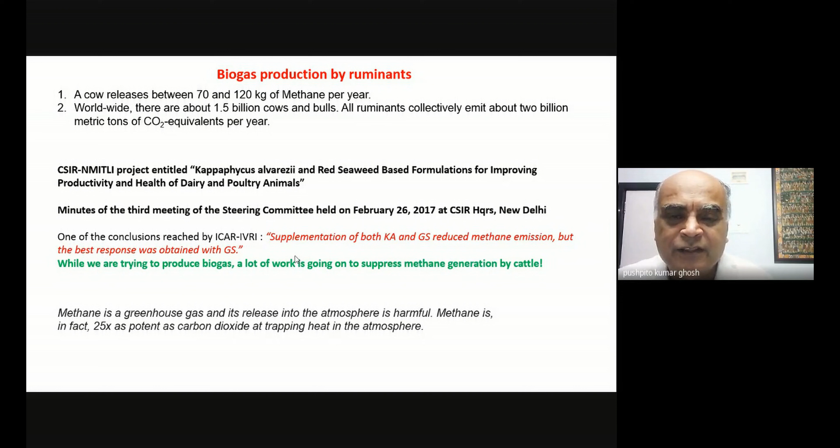So while we are trying to produce biogas, a lot of people are also trying to suppress biogas. If there was a way of linking up the cattle to some kind of pipeline, so that the methane they're emitting is basically going through that pipe, that would be marvelous. But I don't know - it will be a difficult technology to look at.